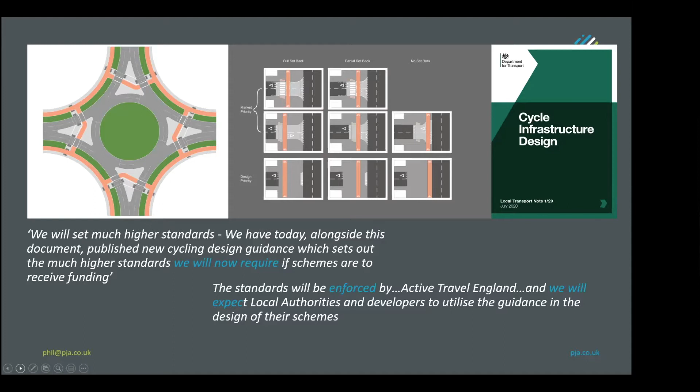So local highway authorities are expected to embed LTN 1/20 into their local standards. So quite strong words, really.

Gear change includes statements about the kind of infrastructure it expects to see - physically segregated bike tracks on main roads, the most important thing we can do to promote cycle use. So that's a really strong statement.

It talks as well about more than just main roads. There's a strong thread in Gear Change and in the LTN about what we've now come to call low traffic neighborhoods, or we used to call filtered permeability - you filter out the car traffic. A great technique, but not applicable everywhere. If you have post-war cul-de-sac based development, this doesn't work. But where much of our built fabric in our inner suburbs and inner cities exists, we can take this approach of filtering out traffic.

Interestingly, Gear Change talks about a community right to close side streets and create low traffic neighborhoods. Quite how that works is going to be interesting to see, because there's nothing to prevent residents conducting petitions now, but it talks about creating that as a right to petition highway authorities. So really empowering local people.

This is Waltham Forest Mini Holland, one of Boris Johnson's schemes - Andrew Gilligan, who was Boris Johnson's transport advisor, we understand was one of the main drivers behind Gear Change. They're now talking about expanding that program of Mini Hollands outside London to up to 12 willing non-London local authority areas, to really get that high dose, as some people have called it, of investment in walking and cycling.

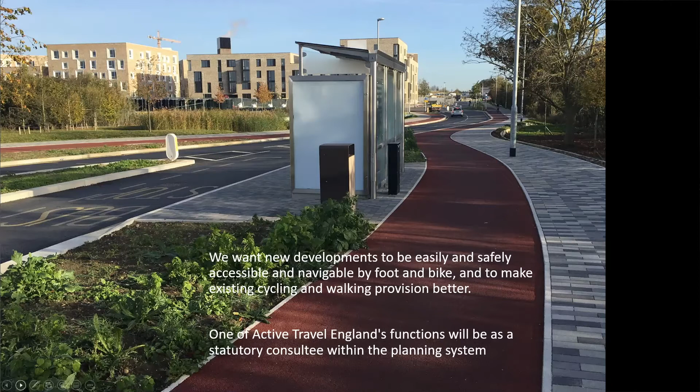So that's a bit of framing, really. Now into the meat of LTN 1/20. I'll try not to make it super techie, but I thought I'll at least cover some of the key points. So what is it?

It replaces two previous local transport notes, 2/08 and 1/12. 2/08 had the same title, Cycle Infrastructure Design, and 1/12 was about shared use. We originally weren't going to replace one of 12, but you'll see the reasons why - we said one of 12 was incompatible with the new terminology and approach used in 1/20. So we recommended, and we were pleased that government accepted the idea that they would also withdraw one of 12.

It applies in England and Northern Ireland. Wales and Scotland have their own documents. But it talks in the foreword about how the quality of the infrastructure must sharply improve. Again, it reiterates the condition of any future government funding for new cycle infrastructure - it's designed in a way that's consistent.

But this is really interesting - to receive government funding for local highways investment where the main element is not cycling or walking, there will be a presumption that schemes must deliver or improve cycle infrastructure to the standards in this local transport note. So again, even though LTN 1/20 says that it's guidance and not standards, in the foreword it calls itself a standard.

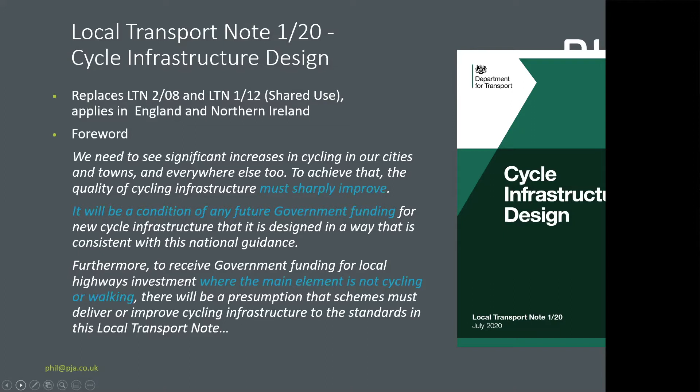So it's clear how government intends this to be received, and it actually does talk about even where authorities are spending money that is not government money - and of course they could, using this test, not apply LTN 1/20 - Active Travel England will act as this inspectorate and see whether generally highway authorities are following this guidance in everything that they do. So it really is being held up to be quite a powerful document.

I won't go through this in all detail, we'll just give you a flavour. Obviously, you can have a look at the contents list yourself, but it's a lot bigger than the old document.

It's not as big as some standards. The London Cycle Design Standards is a much bigger and more detailed document. But for Department for Transport, it's pretty detailed, really, and compared to other local transport notes, it has quite a lot more detail in it. It talks about the planning process for cycling, principles and processes.

Chapter 5 is the basics of geometric requirements, almost regardless of the type of provision. Then chapters 6, 7, 8 are the real meat of it, talking about three types of provision: space for cycling within busy highways, quiet mixed traffic streets, and lanes or motor traffic free routes. It's kind of agnostic between those, saying all of those can be good and can make up your cycle network. Then we've got transitions, junctions—that's a big chapter.

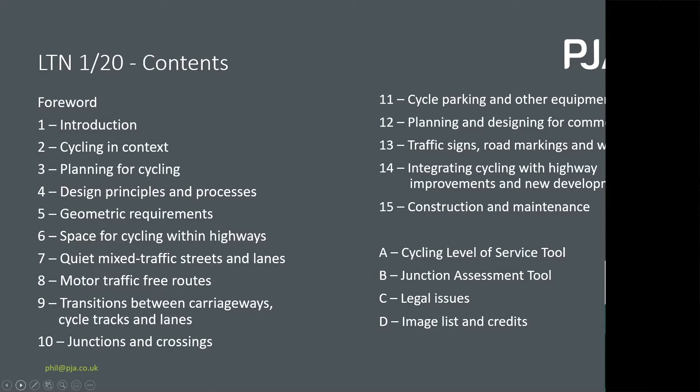Then we're into the details of cycle parking, commercial cycling, which is cargo bikes and bike hire, traffic signs, a whole section about new developments and new highways and so on, and then construction. And then the appendices—I'll touch on a couple of these, the audit tools, which are quite important. So that's a quick overview.

What's really changed from last time? Well, I think for the first time, DfT has set out in some detail what it considers to be acceptable. In the past DfT has rather hidden behind the highway authorities, saying here's some guidance, but really highway authorities themselves know what's best. Here it's taking a stronger line about what's acceptable.

As I said, there's no hierarchy of provision. The old LTN said the best way to provide for cycling is to reduce motor traffic volume and speeds, so that you could safely cycle on the carriageway in mixed traffic. It set that up as the preferred choice, and of course that's really difficult politically and technically to do. So it's neutral now—all of those three can be acceptable and can make up your network as you go from one to the other. So the old LTN 2/08 was a bit of a counsel of despair, really.

It said there will seldom be space to create cycle tracks. You're picking up a document about cycle infrastructure design, and it tells you that in most places you can't fit them in. So it says your first choice should always be to reduce the volume and speed of motor traffic to make it acceptable to cycle on the carriageway. Only if you can't do that, do you then do something else—and if you can't do that, you do shared use.

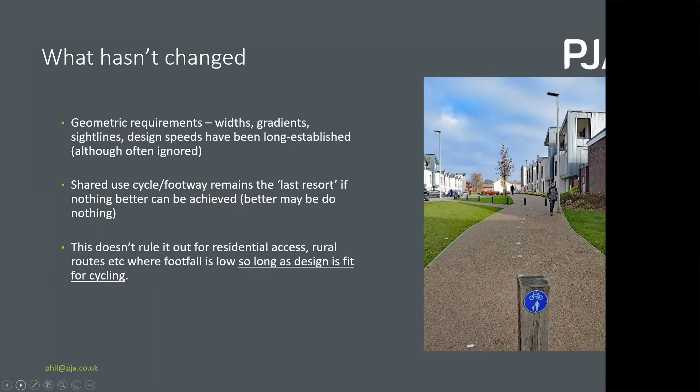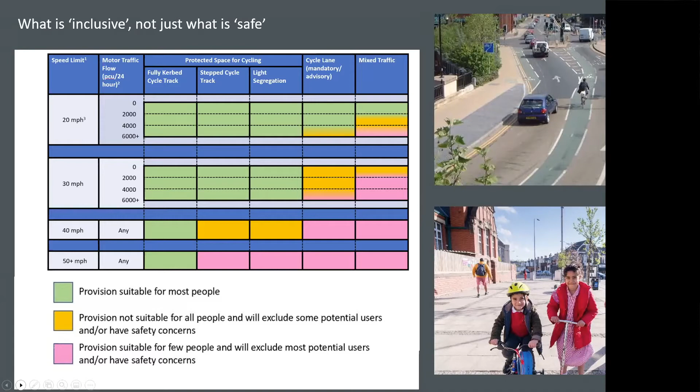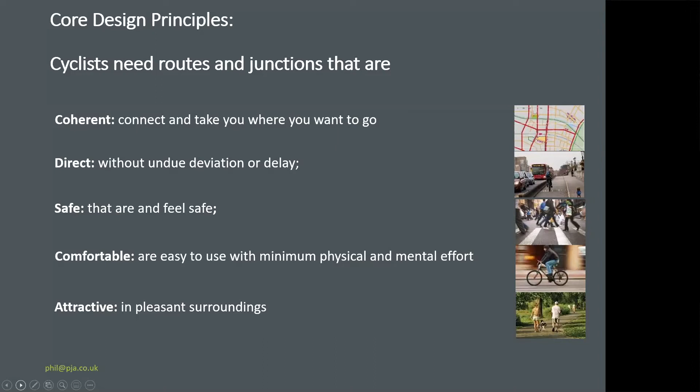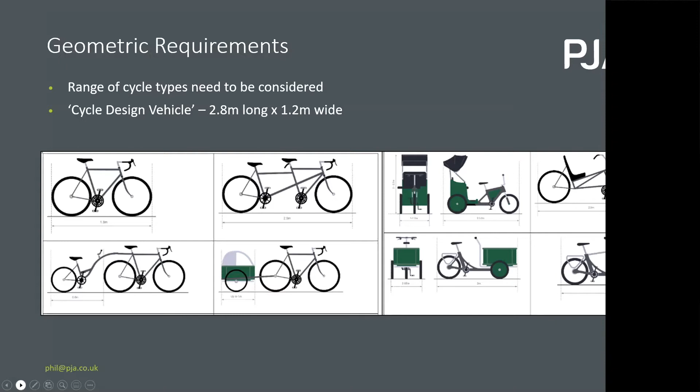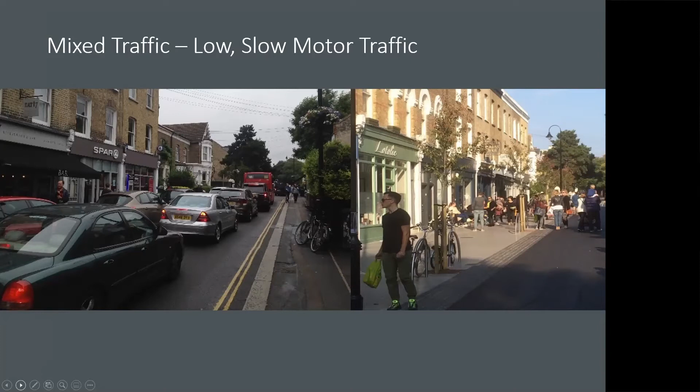So I think it's great that Cambridge is investing in those routes in Cambridgeshire. But when it comes to cycling within highways, again we use the term protected space, and we talk about three types.

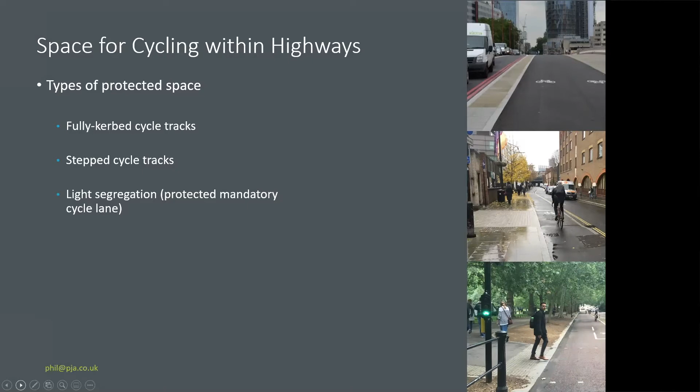Fully kerbed cycle tracks, where there's a buffer and it's raised with a kerb. Stepped cycle tracks, where there isn't a buffer, more the kind of Danish style. And then light segregation, where there are intermittent features that give some protection. Those have different applications.

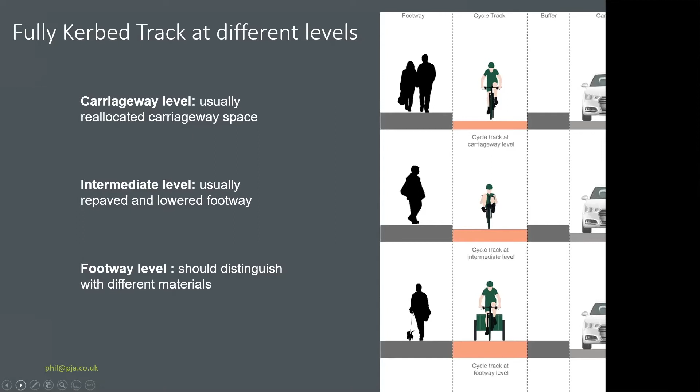When it comes to the fully kerbed cycle track, which is obviously the aim, we say it doesn't really matter to the user what level that is at. So we talk about a cycle track at carriageway level, at intermediate level, or at footway level. We're very keen, particularly with the footway level one, that we don't call that segregated shared use.

I always felt that this term in the old document, segregated shared use, was a bit of a kind of oxymoron, really—if it's shared, it's not segregated. So we've said that is no longer a term to be used.

Segregated shared use almost implied that this was one thing, a footway, that you happened to put a white line down, but it was still one thing that had been segregated. We're saying that bottom picture is actually two things: a footway and a cycle track. You should regard them as two things, even though they're at the same level as one another, and they should be paved differently, look different, and feel different. It's a terminology and design approach that's important.

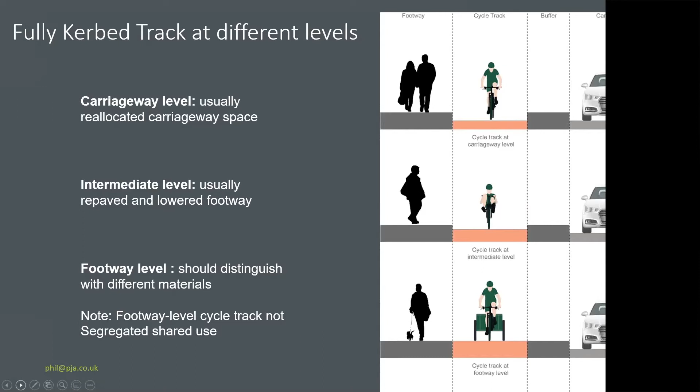So, carriageway level, intermediate level, footway level—that terminology is better. You can see in the right-hand image, I think that's on Blackfriars Bridge: there's a slight upstand, there's a rumble strip, it's not white paint, but you're left in little doubt where you should walk and where you should cycle, even though for construction and engineering reasons they are at the same level. So we think that terminology is kind of helpful.

I won't go into great detail, but there is quite a lot more information in this document, not as much as there is in documents like London Cycle Design Standards. I think Manchester is also producing stuff, and Cambridgeshire will, and this won't stop. There will be lessons to be learned, and knowledge will continue to be gained. But this is what we've put forward at the moment, to a reasonable level of detail, to enable engineers to pick up the document and get a reasonably good idea of how they should approach the design of junctions.

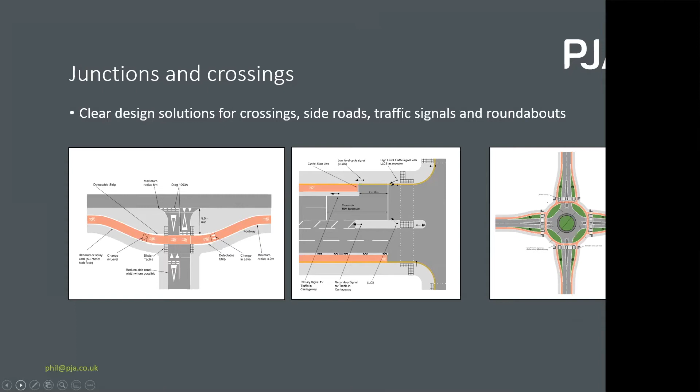Things like saying, no staggered crossings. Again, the bicycle or the cycle is a vehicle. It has a turning radius. It's not a wheeled pedestrian, and therefore this kind of provision is just really, really poor, and we shouldn't be doing it. We should be doing stuff like this.

I won't go into this in detail, but there's another chart that looks like the other one that tells you different types of crossing, how many lanes you're going to cross, what the volume of traffic to be crossed is, and gives you a clue. And again, grade separated is the one that gives you a green box for everything. It doesn't matter - it's included there for completeness, but it's not really an at-grade crossing. It's a bridge to take you over the major road.

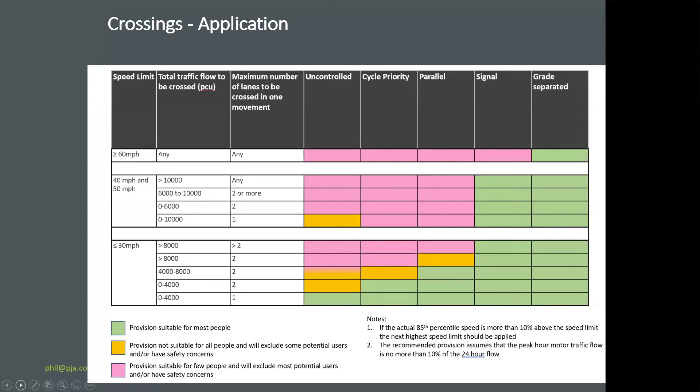We've spent a fair bit of time thinking about side roads, and I hope - this is perhaps a bit of a bold claim - but I think this problem of if you take cyclists off the carriageway, which is where a lot of people would like to not be, they'd like to be in some protected space alongside the carriageway. You've then got the problem of how do you cross the side roads, and we've been trying to solve this, I think, since the 1930s.

When cycle tracks were beginning to go in large numbers and major roads were being built, they weren't doing very well at that stage, so organisations like the Cyclist Touring Club began to campaign against these cycle tracks because they weren't giving priority at side roads. They felt, to have their rightful place and priority, they had to cycle on the carriageway. For a long time we had this split between the different cycle lobby groups. I think if we can solve how to get cycle tracks safely and with priority across side roads, then that is the absolute key to making off-road provision work, and for more experienced cyclists being happy to use them and not feeling they've got to battle it out with the trucks.

So we've included this diagram that we hope sets the picture about how you do it. We've talked about the setback, so where the cycles are in relation to the carriageway, and then whether we have marked priority - in other words, full legal priority over traffic turning in and out of the side road. We can do that with a parallel crossing in the top line, or with give-way markings in the middle row, or we can use what we call design priority, where just through the design of the facility it's absolutely clear to the user who's got priority. And of course you can use design priority with marked priority as well to really strengthen it.

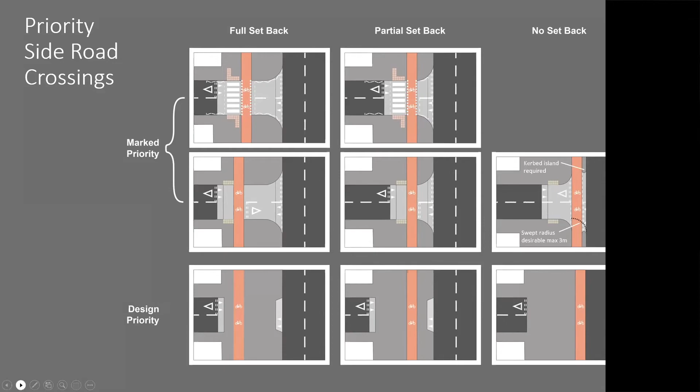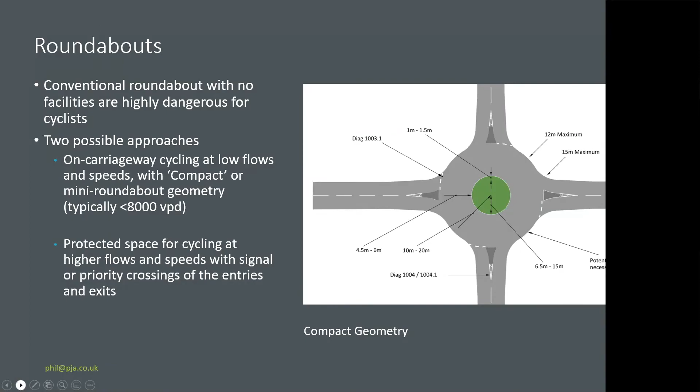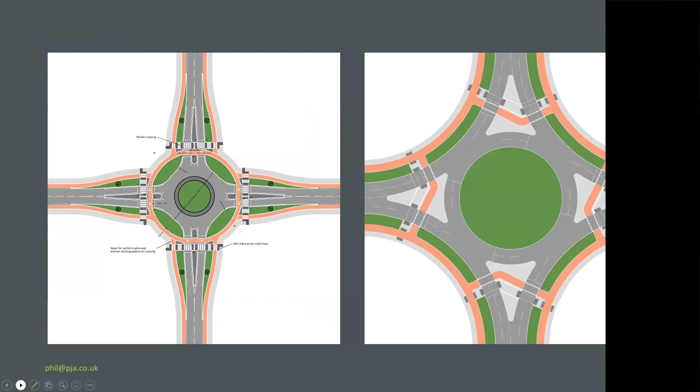And where we have bigger roundabouts, we either use it as a priority junction using the parallel crossings, which are great, now we can use those on our junction arms, or we can do it with traffic signals where we provide signalized crossings. I'm really pleased that this has happened in Cambridge, and I know there's been issues raised about it, but I think it's a great step forward.

So that's really important. I'll just finish on LTN with the level of service tools. These are really, really important, and they're in the back of the document. How good is this? Have we achieved an adequate standard, and will we get the money?

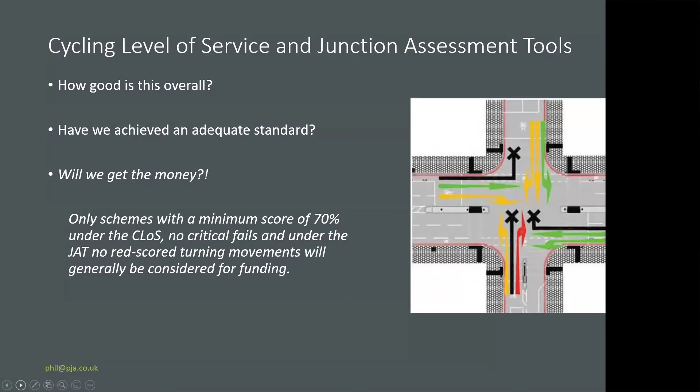It says schemes where you score 70% using these tools, that's what's needed to get funding. And the way the junction one works, you look at every move at a junction and you score it red, green, or amber, or banned, or impossible. Then you give it a score and you work out a percentage. So that's kind of how that works.

So any junction, any movement, if it gets these conditions, cycle movement in potential conflict with heavy motor traffic flow, scores 0. Low traffic speed and volume, mixed traffic environment, access only streets, scores 2. So we hope it's fairly simple.

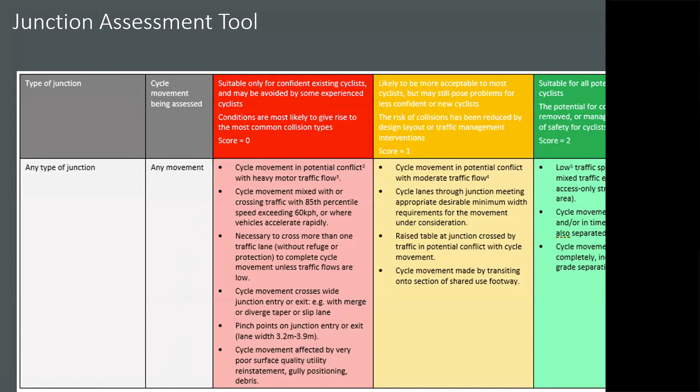See how people use it. The cycle level service tool, again, scores things red, green, amber with different sort of criteria. It's the same as the one that's in the Welsh active travel guidance. So again, this is more of a route, and the other one is junctions.

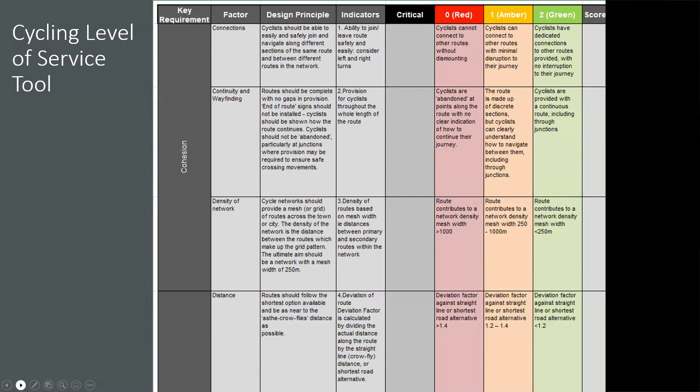So that's all I want to say about the LTN. Obviously, we can go into questions about that.

But I just thought I'd finish with a few slides about where I think we are, maybe with some of the emergency situation. I do think it's significant. I mean, the fact that we're doing this on Zoom. I know that traffic volumes have come back up a long way, but I do think some of these changes might be permanent.

This was an online poll. I was involved in a webinar, and you can see 90% of people on that particular call, this was back in June, said they would work from home more, and so that has kind of impacted journeys to work.

This guy is the head of land and development for Homes England, and he was talking about a tweet he did in October last year about how he'd gone to Liverpool, London, Birmingham, Cambridge and Manchester for business all in the same week, and he loved it. Now he says it was a lifetime ago and so unnecessary.

I think we're going to see a lot less commuting and business travel, and we have the opportunity to really bring traffic volumes down. We've seen that in the pandemic—car traffic, I last checked at the end of September, so it may have crept up a bit, but it's kind of flattened off, higher at weekends, but weekday traffic is down. Cycling was still up, even though public transport use is down.

If you look at congestion, which is really interesting, London's congestion is back up to where it was before, but a lot of that is because people aren't using public transport. In these other cities, congestion is still something like 30% down, because the morning and evening peaks are where the commuter trips are not happening.

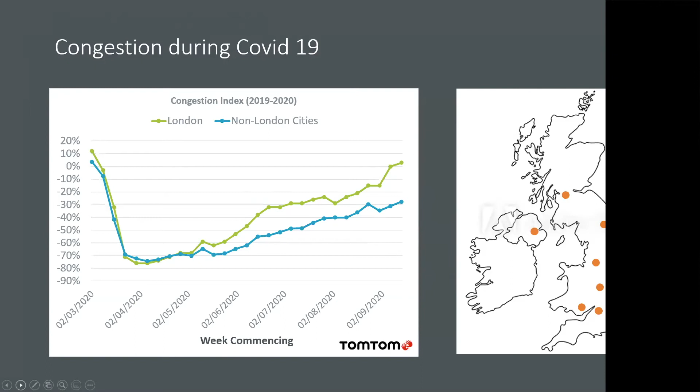I think there is still a huge opportunity, if we grasp it, for road space reallocation. Government is not blind to that—they've made 250 million in funding, and statutory guidance came out again in the summer calling for swift and meaningful plans to reallocate road space, to seize this opportunity while we have it. But there's been a backlash.

If you read the media, the impression you get is that these low traffic neighborhoods are incredibly unpopular. I don't think that's true. I think many more people think they are popular, but you always hear from the kind of naysayers. I know some campaigners are starting to keep a schedule of all these low traffic neighborhoods, including old ones, because we've been doing these for years as environmental cells, just not calling them low traffic neighborhoods. There are hundreds, and people are beginning to collect them.

It's only a handful that have actually come out under protest, and most of them are staying in. Like this one, which we worked on in Birmingham, in King's Heath, that went in only in the last couple of days with planters and all the rest of it. And if Birmingham can do it, Motor City, I think anywhere can.

So that was my last slide. I hope that's been useful, and I'm very happy to go back in and take questions.

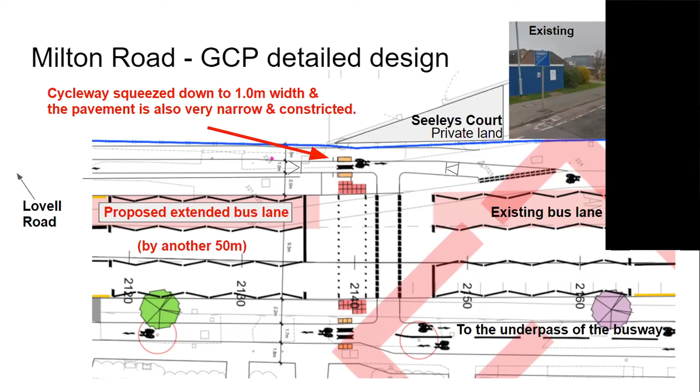While much of the scheme is very good, 1.0 meters is well below the absolute minimum. As Phil included in this chart, the absolute minimum at constraints is 1.5 meters, because we need to support all kinds of cycles, including tricycles, recumbents, hand cycles, and cargo cycles, which need some wobble room. The cycle design vehicle, the standard to design around, is 1.2 meters in width, plus wobble allowance. So 1.0 is definitely too narrow, and what needs to be done is accept that you can't extend the bus lane if you don't have the land to do it.

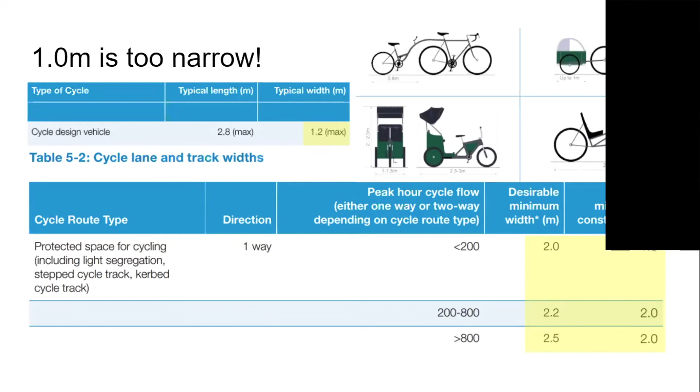I'll move on to another current topic: Station Square and what was supposed to be the Chisholm Trail. There's a big problem currently, and a big development just north of this spot going to committee tomorrow. We've been working on this issue for 2 years, and almost 2 years ago we asked members of the public for their descriptions of cycling through Station Square. I included this snippet from Amanda, who said she was inches from being hit by a car entering the 'mini roundabout of death' - I've really enjoyed that nomenclature.

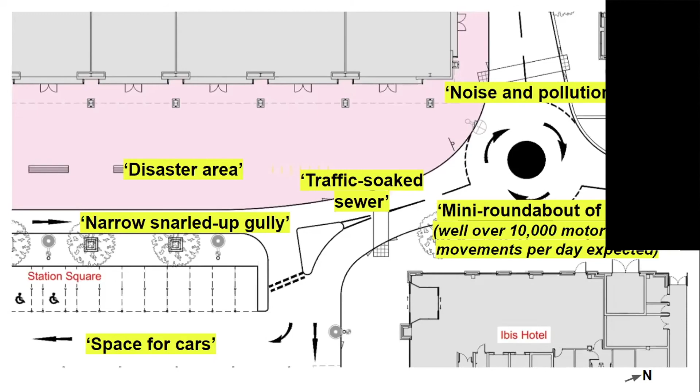Here's a top-down view of Station Square and the mini roundabout of death, which unfortunately has over 10,000 motor vehicle movements per day, many of them taxis picking up and dropping off, plus delivery lorries doing very strange things. Looking at Local Transport Note 1/20 and the junction assessment tool, any roundabout with high traffic throughput - more than 8,000 motor vehicles per day - is not suitable for novices or less confident people, and may even be avoided by experienced cyclists. It gets a score of 0, meaning that infrastructure wouldn't be funded.

There's also a specific note about mini roundabouts: at larger, busier ones, off-carriageway protected space for cycling should be provided. So Smarter Cambridge Transport and us have proposed an alternative that takes the Chisholm Trail off the carriageway entirely, avoiding the whole mini roundabout mess by going on a different route. I won't get into the details, but that's being evaluated by the committee tomorrow.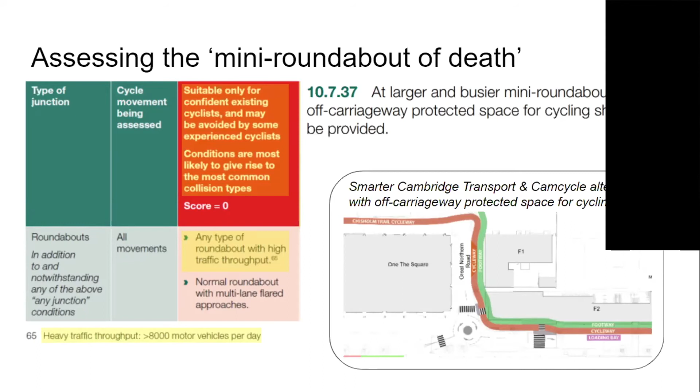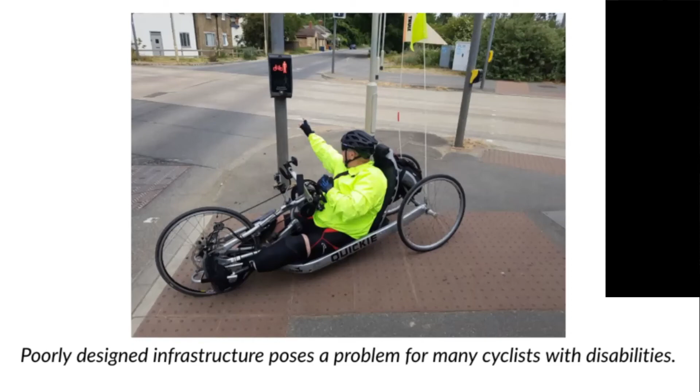I want to take an example from East Cambridgeshire: the recent Lancaster Way, A142 roundabout consultation. This would also apply to the A10, A142 roundabout.

There's a proposed expansion of the existing roundabout entry lane from 1 to 2 lanes. It's a pretty busy roundabout. I don't have the exact traffic figures, but it's definitely got to be in the 8,000 or so range.

This already has an uncontrolled crossing, which is actually rather challenging to use currently. It's not suitable for all people and will exclude some potential users. Unfortunately, the current proposal is to make it even more dangerous to cross by making it 2 lanes to cross, and probably more traffic. So that would exclude most users instead of just some.

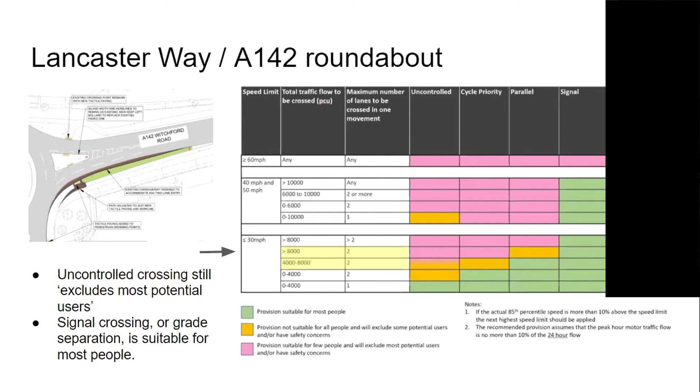LTN 1/20 suggests that the correct answer here is to actually put in a traffic signal crossing, or of course a grade separation would be nice, but it's not necessary. A traffic signal crossing would be suitable for most people in this position.

Another example that's also a live issue is the A1307 at Haverhill Road and the Gog Farm Shop, where we've had a very, very vigorous discussion amongst all the stakeholders about what to do at this particular crossing. The A1307 is currently national speed limit, I believe, at this point, and they are proposing to reduce it to 50 miles per hour and un-dual the carriageway so that it's 50 miles per hour.

But they were supposed to do a grade separated crossing, and then they reduced it down to an uncontrolled crossing with a refuge. Even though you only have to cross 1 lane at a time, because this has so many vehicles on it, 15,000 per day, if you look at the chart here again, that is considered to be provision that would exclude most potential users, whereas a traffic signal, which has been rejected up until now as an alternative to grade separation, would actually be considered suitable for most people.

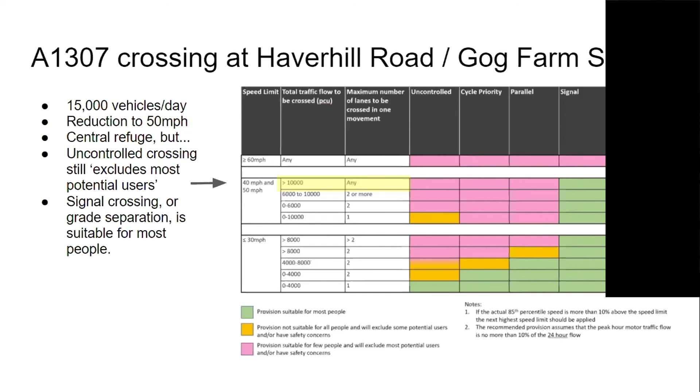So I just wanted to run through a few quick examples. We could go through, honestly, hundreds, but I don't want to sit here all night. So any other questions would be welcome, and thank you for coming.

In terms of the development control process, it's certainly my experience, and I don't wish to be unkind, but there are differences of attitude sometimes between officers who work within a highway development control function and officers who maybe work in more general highway planning and perhaps with a foot in the active travel camp. I think perhaps it's because highway DC officers often hear what the public says about new development, and what the public says is always there's too much traffic. So they feel under pressure to accommodate that traffic, to make sure that developers provide enough highway infrastructure that any traffic impact is mitigated. The mindset is often about providing more capacity so that there is no congestion, because that's what the public expects.

I think maybe historically they haven't thought as much about the way you could deal with that traffic congestion concern by encouraging other forms of movement. That's a bit of a mind shift that perhaps needs to happen in parts of the profession. Only when that changes, when development control officers feel that is a thing they should be asking for, they will then push the developers, who will push their consultants, and there will be a kind of leveling up and a learning process.

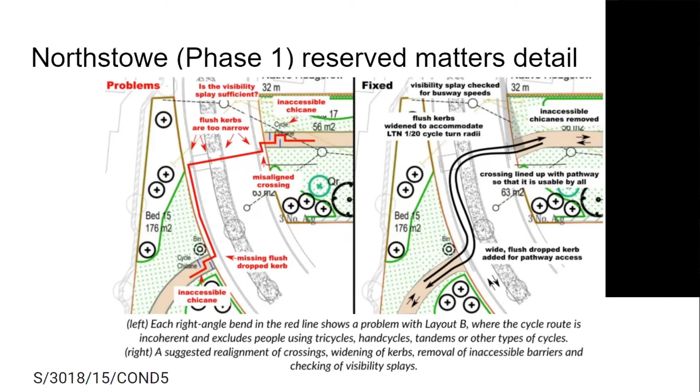It's wrong, because the more capacity you provide, the more it fills up with cars, and that's exactly the mistake being made in new developments as well. They think they can provide enough so there's no congestion generated, but all that ends up doing is you end up with pavements and cycleways covered with cars and everybody drives everywhere.

So it really - and I'd say Cambridge is coming around to this, and it has in the past - they realize they have to reduce motor traffic capacity in order to reduce the number of cars coming into the city.

It's the only answer, especially with Cambridge's historic compact character that we all want to protect, because it's what makes life here so great - it's why we want to live here. We hope the villages feel the same way too; they want to be compact places where people can walk around and get to know each other. The only way you can have that character is by reducing motor traffic. So it all comes down to that, really.

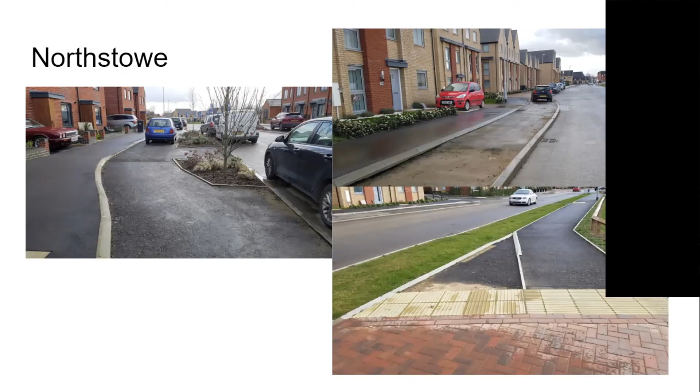And to model that is really difficult - what do you assume? Actually, it wasn't a problem. So I think trials are really powerful and enable people to see what it actually will be like.

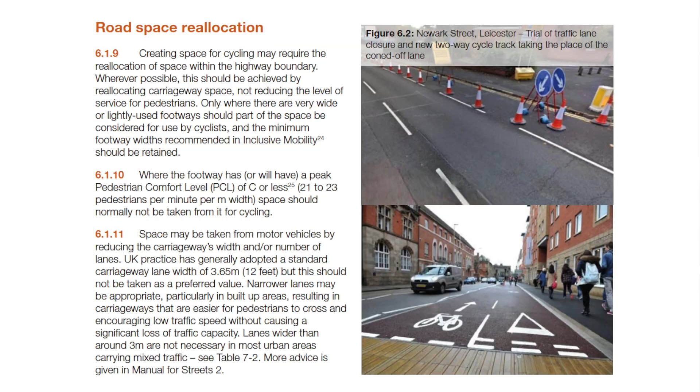We put a little bit about that. I think the focus of the document really is more about the infrastructure, and this is really just making that point. But I think generally in transport policies, there's certainly scope to do that.

The government at the moment hasn't yet strongly supported it, I think is fair to say. But the government is working on something called the Transport Decarbonisation Plan. In March, it was worked on pre-COVID and rushed out just as the whole lockdown thing began. It's quite a good document, and it sets out the huge challenge over carbon emissions, and the fact that transport is the largest contributor to greenhouse gases in the UK.

A lot will have to be done, and I've been on some webinars with DFT pushing this argument, so I hope they're listening. There have been some grants available for cargo bikes at the margins, but there hasn't been a huge push so far. I'd hope that as part of the transport decarbonisation agenda it will get a greater push, and of course it's also very good for air quality and congestion relief. More to be done, in a nutshell, but hopefully that's the direction of travel.

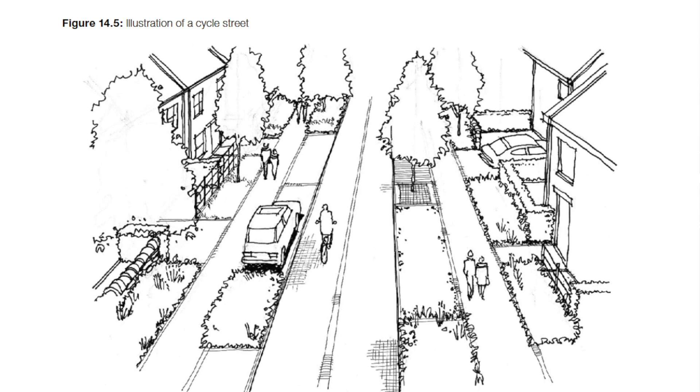It's something that we do as a practice - it's kind of bread and butter to us, and it pains me the way that we're required to do them, really. But we do them, and I'd love to have the support and the framework to be required to do them in a different way. It would be great.